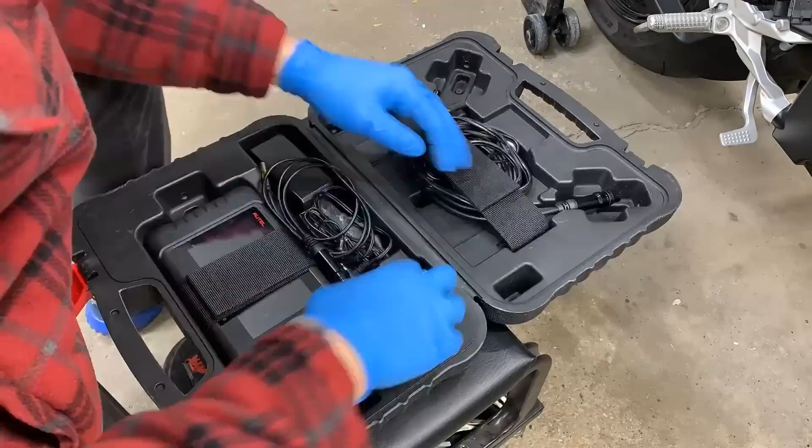Valve looks good, a lot of carbon buildup on it. All right, I'm gonna run through all the cylinders, because this is gonna be boring for you guys.

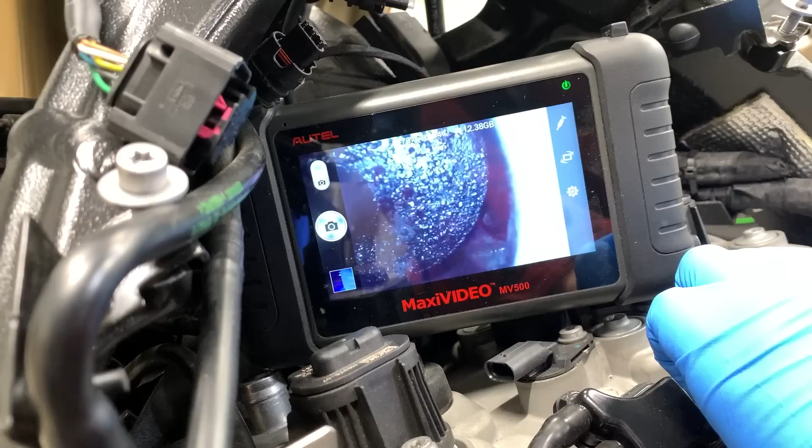So there was a ton of carbon buildup on the valves. Let me show you what I'm talking about. There's a ton of buildup on these valves, on each of the cylinders. I don't know if that's normal or not. This is the next cylinder. This valve top is wet, and then the next side is all dry, so I don't know what that's about. I really have no idea what I'm looking at, but the valves look fine to me. I'm not even sure what to look for.

So let's go through the spark plugs. Let's remove the coil packs and then remove the spark plugs. I don't even think I have a socket for the spark plugs, but we'll figure it out.

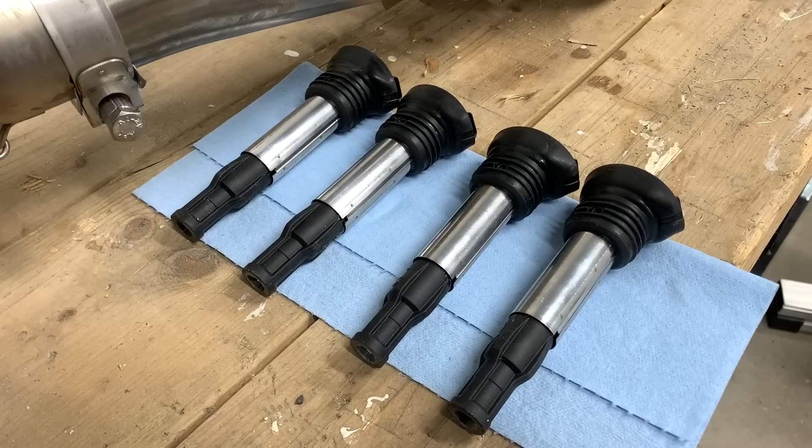I'm in need of a spark plug socket.

Unfortunate, shows how much I know. Those sockets are way too big, those are automotive, not motorcycle. All the stores are closed. We'll catch you guys tomorrow with the right socket.

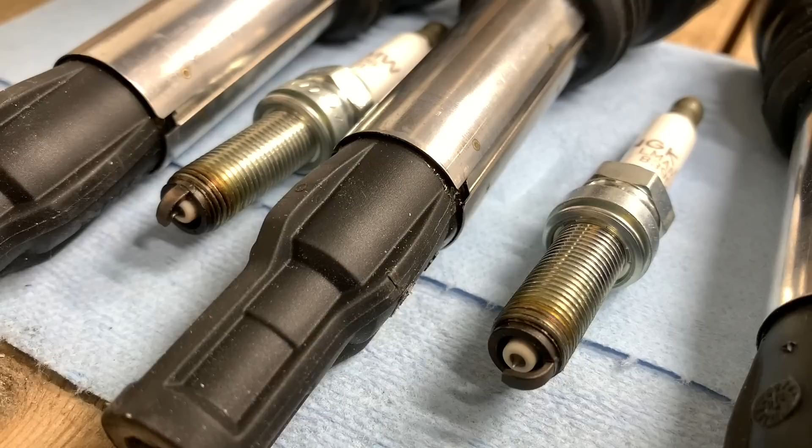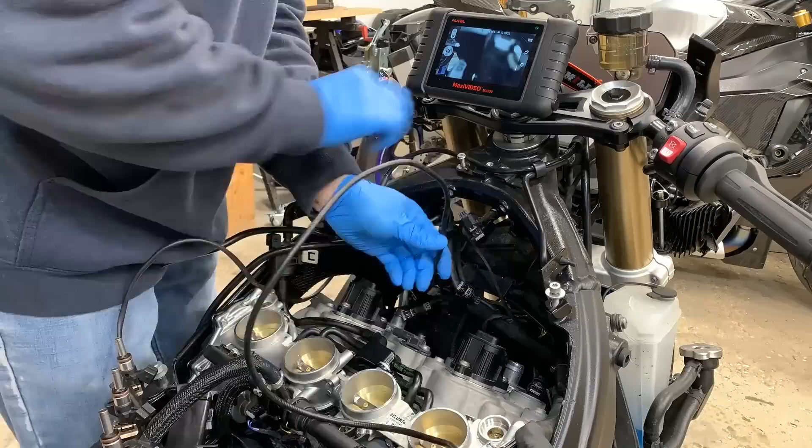All right, we're checking out the cylinders directly. Let's go from 4 to 1, we'll see how it looks. All right, we're gonna go down cylinder 4 first, see how it looks. We're using the side camera right now, so we see the side of the wall.

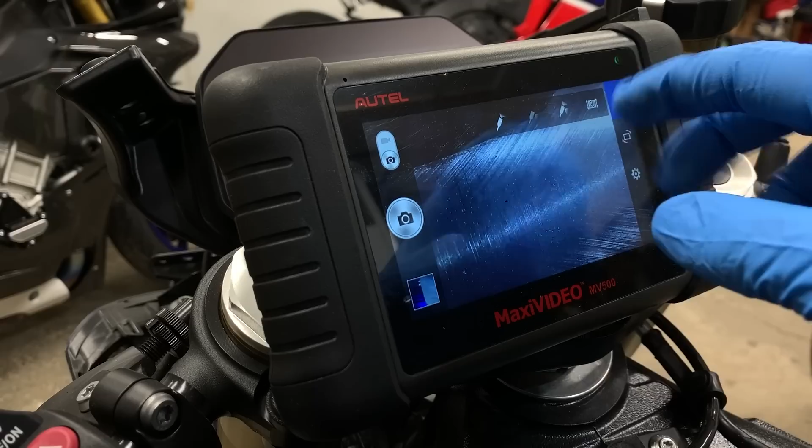A lot of carbon buildup. Now we use the top camera to see the cylinder directly. Ugh, looks terrible in there. Okay, here's cylinder 3, just looks like a ton of carbon buildup. Here's cylinder 2.

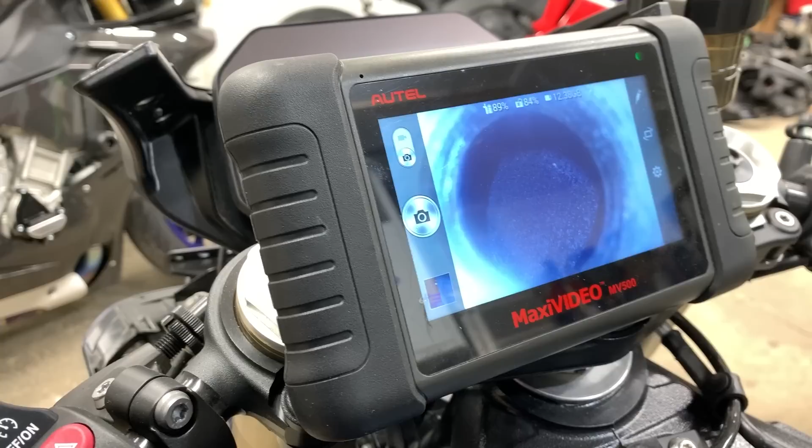Get a side angle - oh, there's the valve. Here's the exhaust valve on cylinder 2, looks fine to me. And lastly, here's cylinder 1. Valve looks good, I'll do the front view. Looks fine to me, and there's the spark plug hole.

So we scoped all the cylinders, no scoring or damage on the cylinders, just a lot of carbon buildup. And here are the spark plugs - they all look good, they're not wet, they just have a little bit of wear. That's normal, I assume. So before I go nuts with this thing and just start to take the head completely off...

...one of you guys reached out over Instagram, and I'll show you the DMs right here. A tech from overseas mentioned he had issues with the fuel pumps on these things, and they caused the bike to not rev over 6,000 RPMs with no codes. So right here is a fuel pump for a 21 BMW S1000RR. At this point, I'm willing to try anything, and I can return this fuel pump if it doesn't work.

So what we're gonna do is take the old fuel pump out of the gas tank, put the new fuel pump in, put everything back together, put the headers back on, and see if it makes a difference. Also, when I turned the bike on previously, there was a fault for the engine ECU. I believe that's because they erased the file at the BMW dealership, so I think I'm gonna need to put a new file on the ECU before I can fully test. Also, I don't think I told you guys the diagnosis from BMW was $276. Was that worth it?

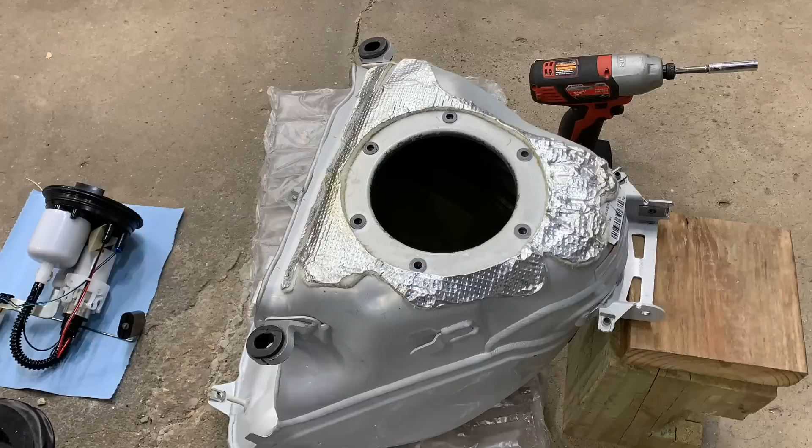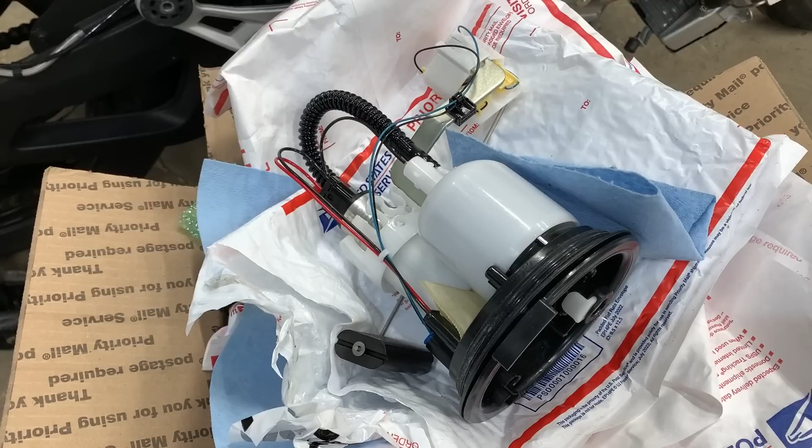Almost forgot the gasket again. Let's start reassembling the beast.

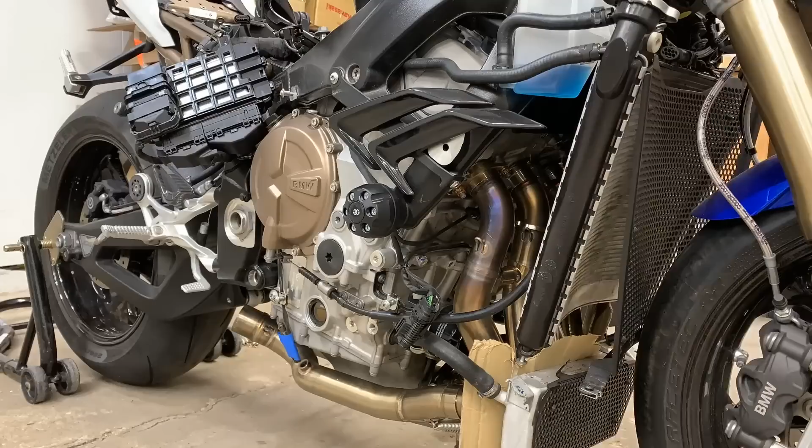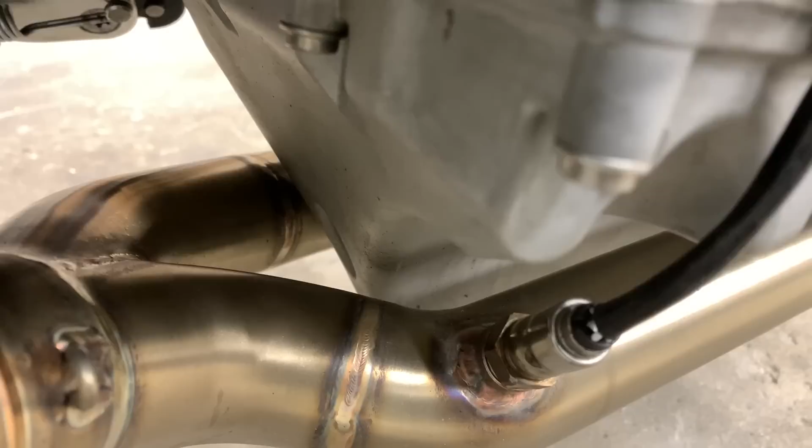The exhaust is back on, the O2 sensors are on, the airbox is on. Let's plug in that ECU and the injectors, load that data file, and start this bad boy up.

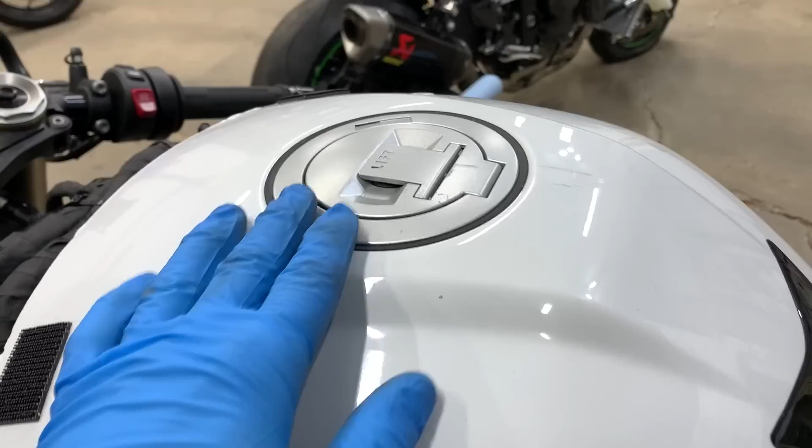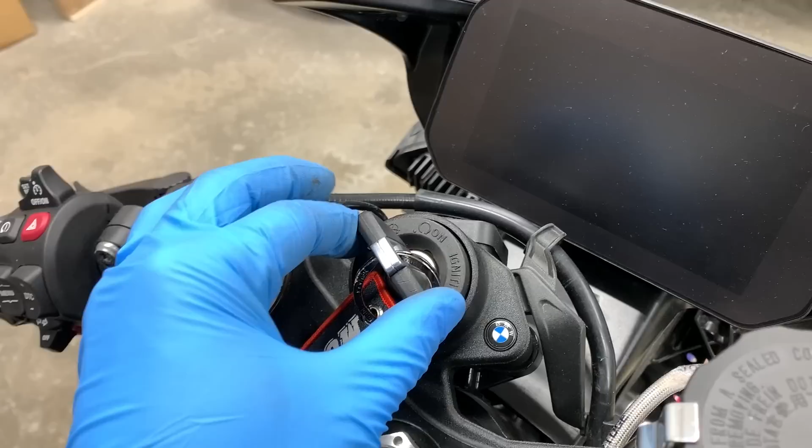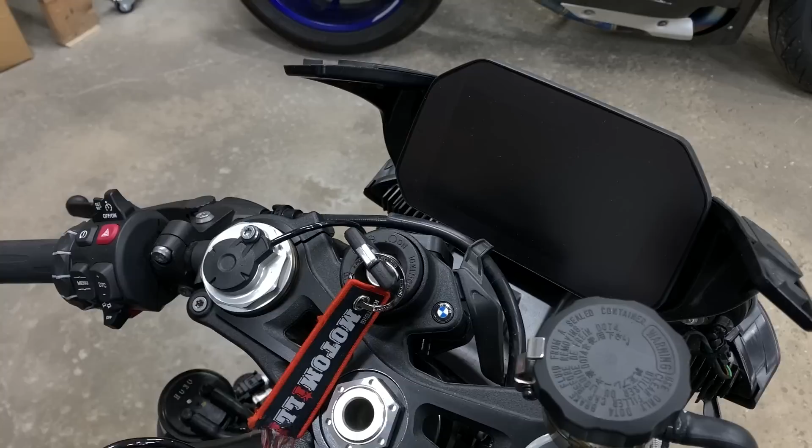I'm ready to hear this thing scream. So BMW deleted the tune on the bike. What I'm gonna do is let the bike run, get past the temp so the red bar is all the way up to 14,000. Then we'll test the throttle and see if it revs past 6,000 RPMs. It's gonna be smelly, it's gonna be loud, and it's gonna be cold.

I'm ready, I'm ready. Starting her up.

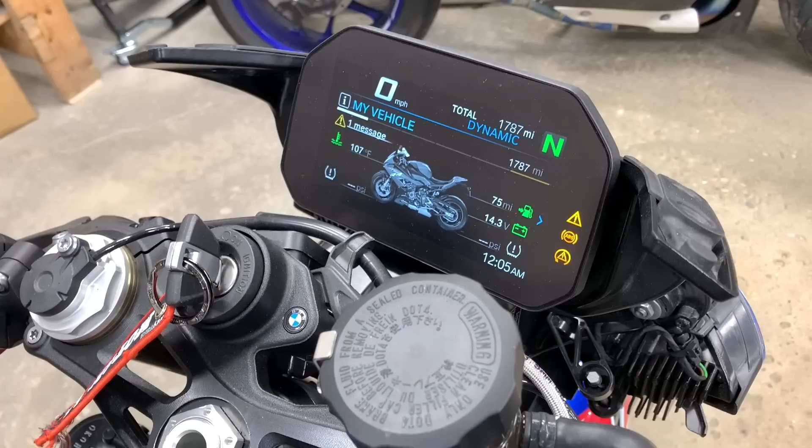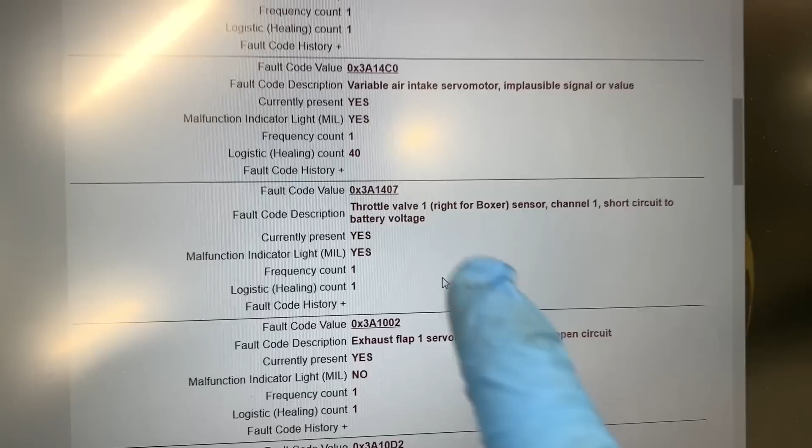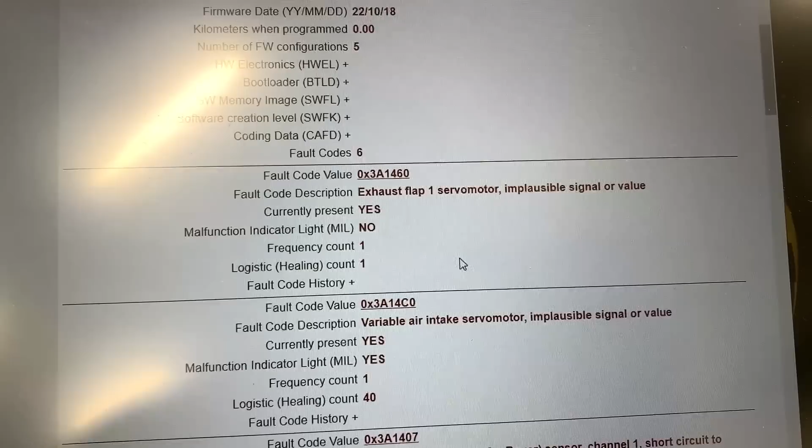Alright guys, so there's a fault in the engine control unit. Let me show you what I found. There are 6 codes for the ECU. All of them except for 2 are because of the mods on the bike, like the exhaust flap and the variable air intake servo motor, which are deleted. This one concerns me though: the throttle valve sensor channel 1 circuit short to battery voltage. I'm gonna have to look into that.

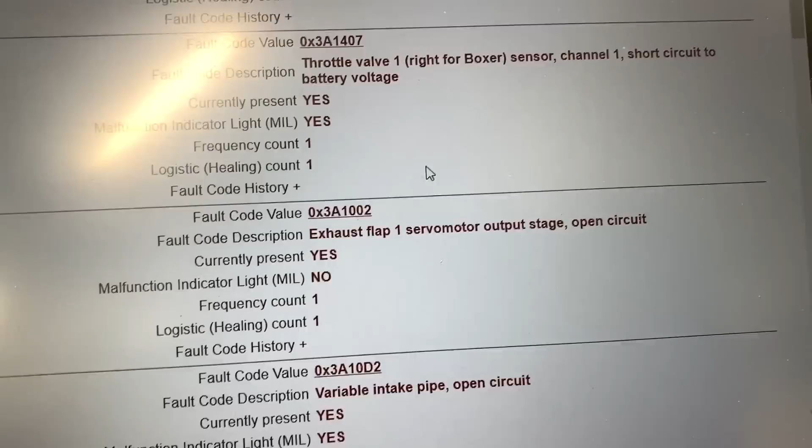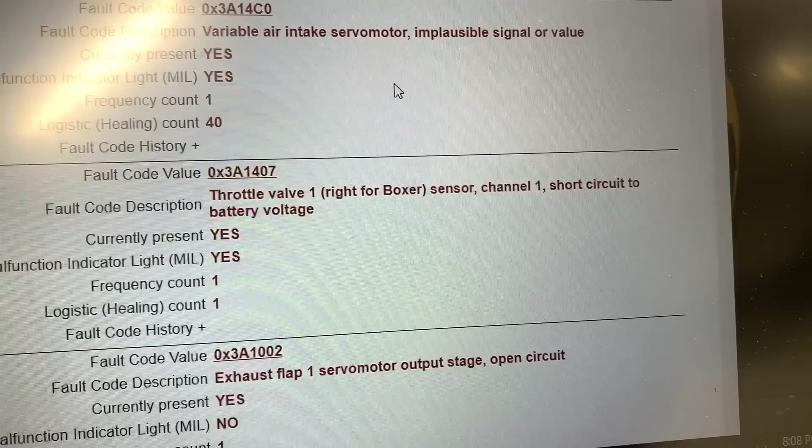Turns out this is literally disconnected. Look at that, it's not even plugged in.

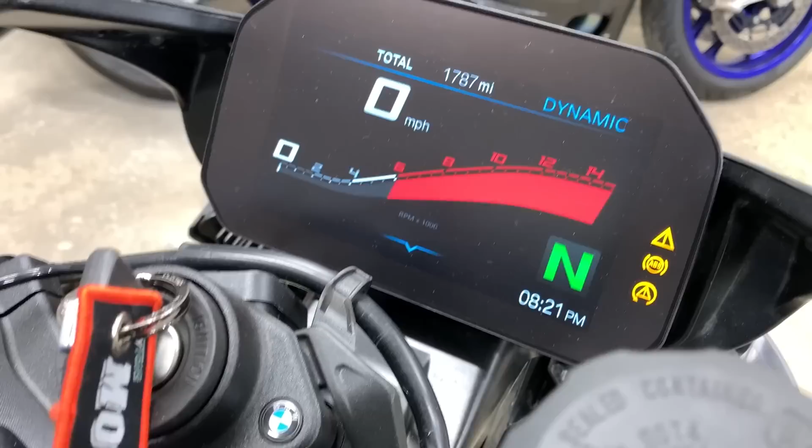So the connector wasn't plugged in because the tab on this is broken for some reason. Now it's plugged in, so there shouldn't be a fault now when I turn on the bike. Nope, never mind, there's still a fault. But I think the code is not present anymore, let's check that out.

So now that connector is plugged back in, let's see if this code will clear on the dash. I just cleared the code for the throttle thing that was open on the left side of the bike. Let's turn the bike on, start it up, and see what happens.

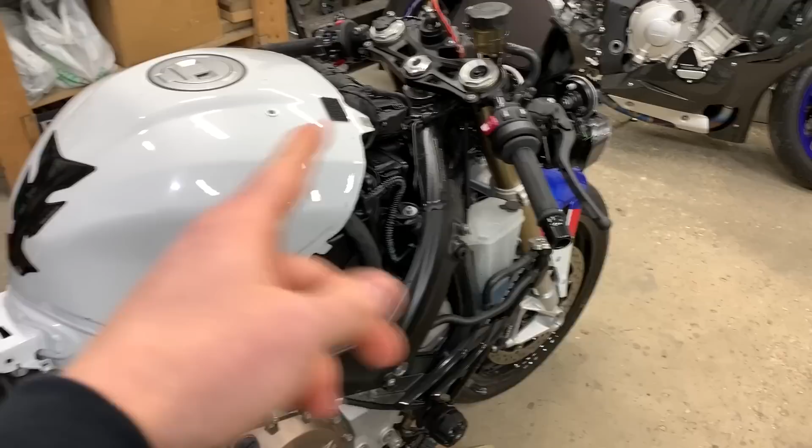This thing is shooting fire, dog. Holy smokes, that doesn't sound good at all. Let's warm her up.

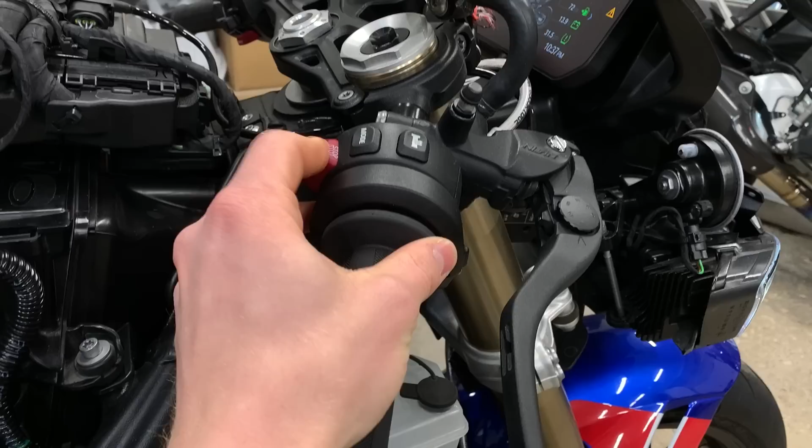Wow, the throttle is so responsive, that's insane. You see that fire? All we did was replace that fuel pump. I did a reset on the knock sensors through this GS911, but I'm still having an engine fault code on the dash. Man, that throttle is so responsive, not like before. And now, as you saw, the bike does rev past 6,000 RPM, so that's amazing. It must have been a fueling issue, so thank you.

I am still not sure why there's an engine fault code on the dash, so let's plug in the scan tool once again, do some digging and see what we find. So the tab on the left side of the throttle is broken, so the clip can't fully connect to it, it just kind of pushes in and sits there. I wonder if that thing is sliding out, causing the bike to have issues. Anyway, let's run that scan and see what we find.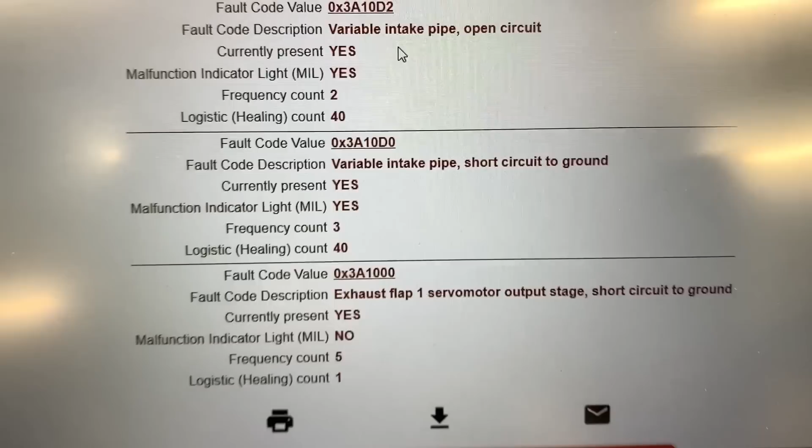Yeah, so I forgot to plug that in. Let's plug it in and see if it makes a difference.

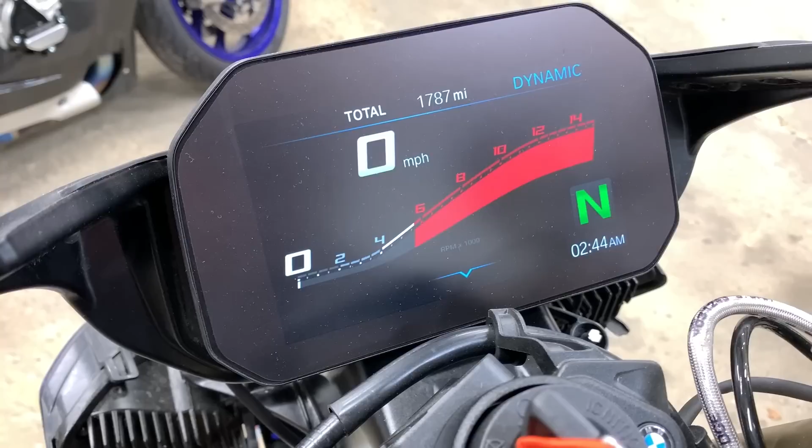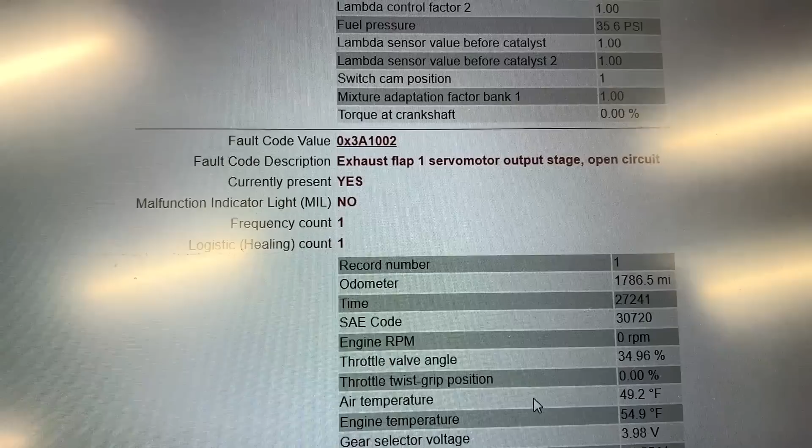So that's the only 2 codes that are left, and then that fault on the dash should be gone. It's very possible that when I was putting this thing back together, I just simply forgot a connector somewhere, so I'm gonna be on the lookout for that, but it is way too late for that now.